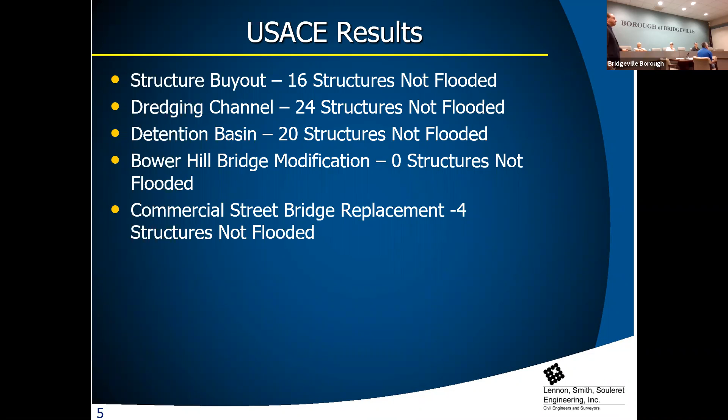So Bower Hill comes up quite often at the meetings. And Joe and I talked about it at the last meeting. Yeah, absolutely, we want to push the county so that bridge gets replaced without that column in the middle, because that's one of the steps along the way. And you want somebody else to pay for that. And then if that happens, Commercial Street has a useful life anyway. At some point in the next 20 years, it's going to be replaced. So that's something you could program over time, because it's a structure that eventually has to get changed out anyway.

It's not a similar structure to what you have at Bower Hill, where that structure's been there since the early 1900s. I think it's the 20s. Yeah, 1920. So that's a 100-year-old bridge. Commercial Street obviously isn't. People probably remember that being built. It's corrugated metal. It's got maybe 50 years. So when Commercial Street gets changed, it's gonna go another 100 years, and we wanna make sure it doesn't have that problem.

So if Alcosan takes care of the manholes or whatever, does that affect the Commercial Street Bridge span? No, because they'll just move it into the roadway, they'll go around.

So what we did when we got brought on to look at this was we looked at the Army Corps model. I reviewed it thoroughly. I got into the actual model so I understood it. Kevin and I walked the community with a number of council members, discussed a few of the areas, the stuff that's occurred over history, stuff that I remember occurring as a kid when I lived in this area. Everybody was on the same page. So then I dug into the model and started looking at options.

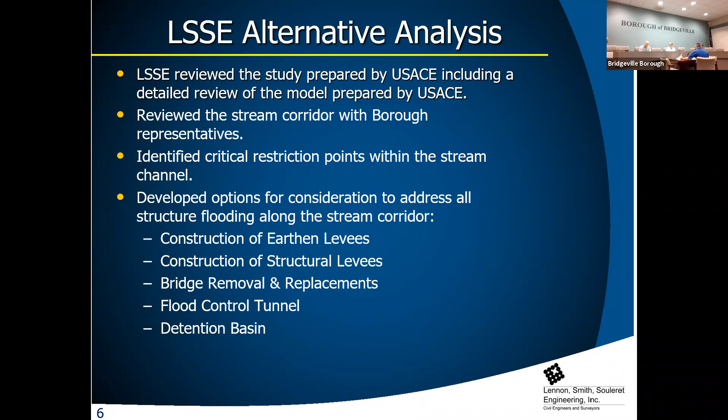So I mentioned the restriction points. The primary restriction points, obviously Chartiers Creek's back channel is one of the key ones, I've mentioned it a number of times. We talked about Commercial Street being a restriction point, and so is Bower Hill Road because of the center columns.

So if we can get that opened up, that lowers the water along that portion of McLaughlin Run for the houses between McLaughlin Run and Maple Street.

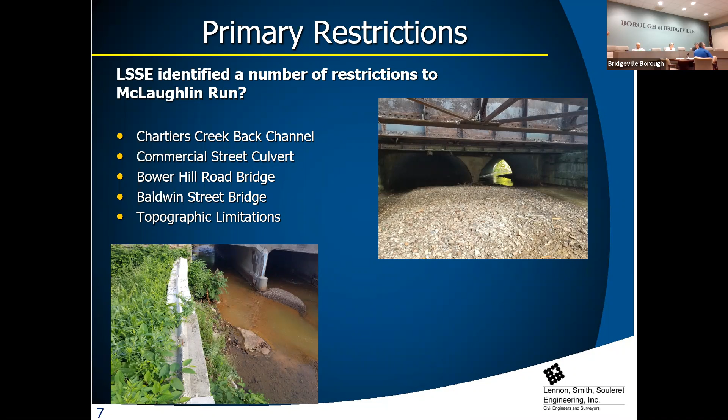And then topographic limitations, what do we have to work with? We have our nice floodplain, which before it was developed had steep vertical slopes. That's Western PA, it's steep vertical slopes. Then we have a floodplain, and we developed all the floodplains, that's where we want to live. That's what we have to work with. So those are the restrictions I looked at when we did the model.

So for detention, some of the stuff we have to think about. For a detention basin, you need an adequate area to do it. In the borough, there's not adequate area to do a detention facility of the size needed to have any significant impact on the stream.

Like I said, the Corps used the area of McLaughlin Run Park. The volume they used was 2.5 to 3 times the size of the ball field area. They had 9.4 acre feet of storage, which was about 4 to 5 acres of property.

We don't have that there. So you'd be digging into the hillside, digging into the houses on top of the hill. The entire park would be lost. They likely took the whole park and made it go away, plus the hillside.

Obviously that goes well beyond what the borough would consider. Losing the fields was a big step. To lose everything up there is probably out of the question, given the amount put into that park.

With the way we have it now, part of the field is not necessarily lost. It's a general activity field once it's cleaned up. It'll take maintenance to do that, but it can be used as a general activity field. It looked really nice, nice and green and flat. It looked great, but there's a bunch of debris.

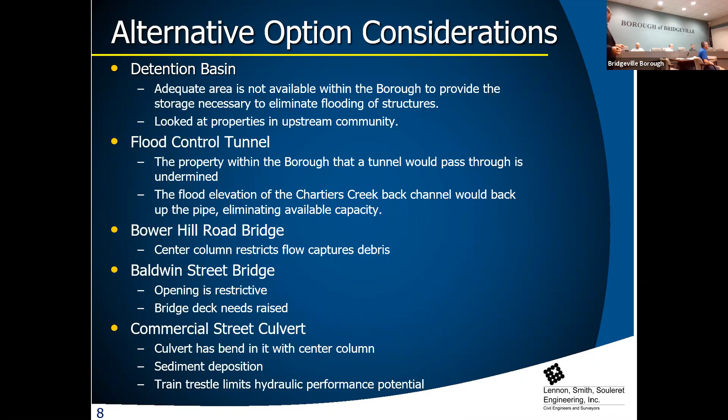So we came up with actually 5 options, though we'd call it 4 options. There's option 1 and option 1A, which is a slight difference—we'll get into that. A lot of these options, the first 3 or really 4, we broke out into 3 phases. These can be broken up into more phases as money becomes available, but we looked at it in 3 phases for costing as well as impact, to see what it would do.

What started this whole thing, for me, when I got into the model, was the first thing I did: I ran a model to put a levee wall from the skating rink up to Commercial Street. That's the first thing I looked at before we even got into the actual flood study of the project. By putting a soldier beam and lagging levee wall basically at the top of the slope, straight down, and cleaning out that sloped area, you actually gain volume in the stream, as well as get a levee wall that prevents the water from overtopping and getting into the property. So it solved flooding, but it also dropped the water surface elevation of the stream. As soon as we started looking at this, we realized that was important.

So phase 1 of option 1 is a levee wall from the skating rink to Commercial Street. It includes installation of backflow preventers on the existing storm sewers so that the stream doesn't back up and bubble up—something that occurred two weeks ago. It bubbled up in the inlets and started flooding the roads, Commercial Street, and Darby Way. Darby Way experienced the flooding before anybody else did; it came up to the inlets there because it's that much lower than the rest of the roads, so it started flooding first.

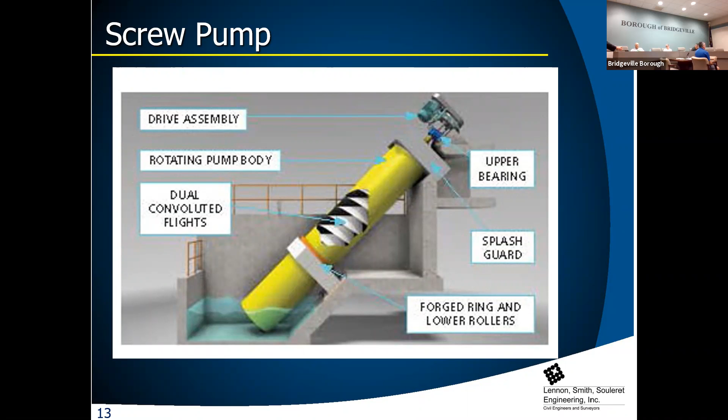You'll work on it, but Coraopolis, their first maintenance was in '72, we have a couple contracts now we're putting together. They've done very little to it over the years. Now, I can tell you they should have done more. They kind of left it go because it wasn't needed often, but now it's needed more. So they've been doing more maintenance to keep it running.

But I mean, annual maintenance, we're talking about a couple thousand. Generators a few thousand, because it's an oil change once a year, and then it's just making sure it runs. I'd say $2,500, something like that, per generator. And then the screw pump itself, we would have a maintenance plan that you would set up, put money into an account every year, whatever it is, $3,000, $5,000, something like that. It'll build up so at 20 years when you have to change out a motor,

the money's sitting there. A lot of people try to do that in reverse. When it breaks, you find the money. I'd rather see the communities do it like this: you set up and you put a little bit in each year. When it comes time to replace it, you have cash sitting there. Just do a dedicated account for it.

Okay, Phase 2, again, from Bower Hill Road to Baldwin Street. We're going to continue that thought process because we're so tight. We're going to build levee walls on both sides of the street there. We're going to eliminate the sidewalk from Bower Hill Road. We're going to promote a different pedestrian traffic route down Baldwin Street and reconnect it. It's not going to be an option to walk down there. Even with the road closed Thursday and Friday night, when they're doing the paving, that sidewalk is not a good situation as it sits. So our recommendation, we're going to get rid of it. We're going to create a different pedestrian corridor.

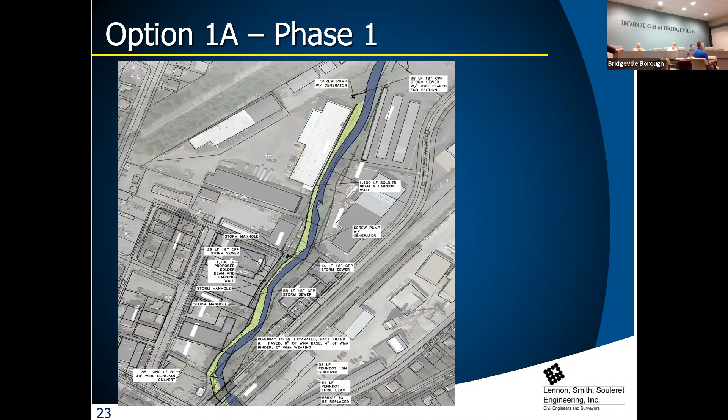So option 1A, I'll make this one real quick. The only difference between option 1 and option 1A is we replace the Commercial Street Bridge here. We can go through all this. The end result is basically a $1 million increase to build the Commercial Street Bridge. So there's the bridge, which is too far. Apologize, let's go back now.

Come on, it's locked up on me.

Does anybody ever recall seeing anybody walk Bower Hill Street, Bower Hill Road on the sidewalk? Yes, I was a kid, there was a couple walking yesterday. Was that you? No, it wasn't me. There was a woman with a little boy. Okay, yeah, I can see one person.

The bus line is with it. So we're going down, it's not pushing the bus over here on the road, over here, go down to the corner by the fire station and walk in there. So they'll come down and walk that way.

I think that's something for your active transportation study, you want to include so they know there's a potential you want to get rid of it. So they can figure out how do we move people to where they need to be then, because I think that's going to be an important component for them, since that's a cost-effective option for you: eliminating that walk and gaining that space for the floodwaters.

So that's again, the big change from option 1 to 1A is there's the Commercial Street Bridge. It'd be a Conspan arch, single span arch. That allows them to make that bend. And then we'll just replace the roadway over top of it. Phase 2 stays the same, phase 3 stays the same in that option.

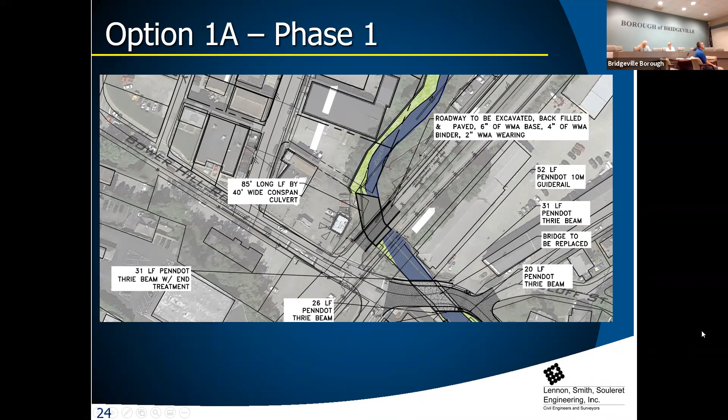And this is one of those that could be a single grant project. No matter what, over time, you've got to change that out anyway. It doesn't matter when you actually do it. The permit's pretty simple to get. And it could be one of those ones you put in for a grant and just do it. You could do it in the next 5 years, 3 years. You could do it next year and say, okay, check that off.

That's one thing. So just because it's an added item, if it's something that practically speaking, everybody here knows is a better situation, to eliminate that center, then we add that to the start of looking for money options. It's an easy project to build.

Okay. Option 2, very similar to option 1 and option 1A. The big difference is the section between Bower Hill Road and Baldwin Street. We looked at this in a different situation. We made Baldwin Street a true pedestrian corridor. We eliminated the Baldwin Street Bridge and put a simple small pedestrian bridge over that area. Greatly improves hydraulics in that situation. Opens that corridor for pedestrians, put a cul-de-sac where Baldwin Street ends, and put a park. So it kind of creates that pedestrian corridor from the residential area down into town.

Phase 1 stays the same. Phase 3 stays the same. It's that core in the center. You start looking at different scenarios in that situation. So, okay, 1 stays the same.

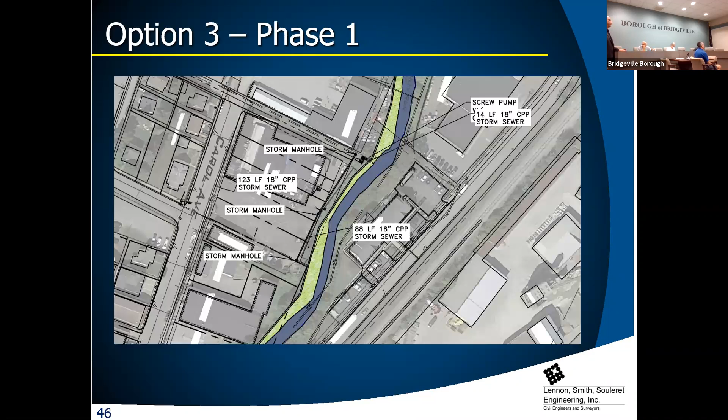So phase 2, we get rid of the Bower Hill Road Bridge. We get rid of Bower Hill Road. We reconfigure the intersection at Baldwin Street. We're gonna put a roundabout. We're gonna replace the Baldwin Street Bridge with a much bigger bridge. And then reconfiguring the intersection at McLaughlin and Bower Hill Road.

Instead of doing structural lagging walls, we eliminated Bower Hill Road. And you see we reconfigured the route on Baldwin Street to make a plus intersection instead of the offset we have today. We're going to do an earthen berm. We're going to create a riparian buffer, so it's going to be a vegetated buffer. It's going to be more of a park atmosphere through that area. That's because you can widen the channel to get rid of water.

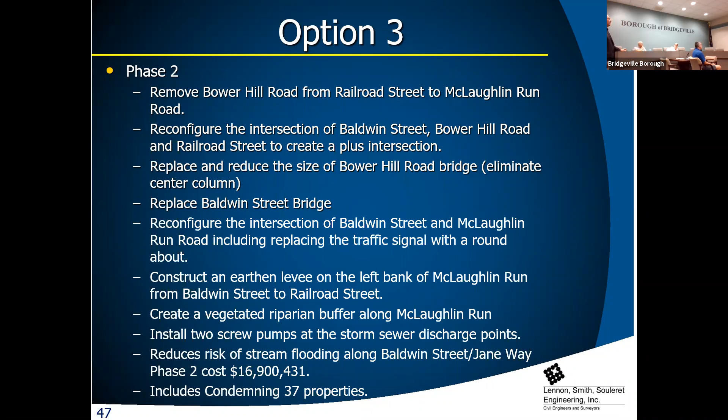Yes. This option, just for this phase, is about 16.9 million. Key to this is it condemns 37 properties. Now it creates a section of land that can be redeveloped after it's all done and probably be resold to a developer that would want to develop it. But 37 properties are going to be condemned. So this is not necessarily palatable, but it's something that's been discussed.

This kind of matches up with the study that was done previously by the land planners for this corridor. There's the plan for that section of the corridor. You can see all the green space that's created. You can see the roundabout down at Baldwin Street. See how we rerouted Bower Hill Road into there so that you don't have that intersection that you have today, where you gotta stick your nose out to try to see. And you get up to where the Beer Distributor is. The Beer Distributor is one of the properties that will be taken, for reference purposes. The road would go right through the Beer Distributor.

It would create a plus intersection, a safe intersection between Railroad Street, Baldwin Street, where it connects in the Bower Hill, and then the road comes up the hill. So we're losing 6 businesses as part of this plan. More than 6. Yeah, there's a significant impact. Yeah, this is a big swing with a lot of impact on properties. This does kind of mimic what the planning document was that was out there.

Traffic flow wise, you hire a traffic engineer, they're going to embrace this plan. They're going to say it's a great plan because it's going to fix the traffic. But it's going to have problems in palatability on how many properties, how many businesses. The impact as far as businesses, economic impact, it's massive. And this one isn't just a dollar impact, 16.9. This eliminates a bunch of businesses. Yeah. They may flood today, but they're no longer here, so they go off the chart as far as that. But then you don't have your tax revenue. But you do, like, all directions.

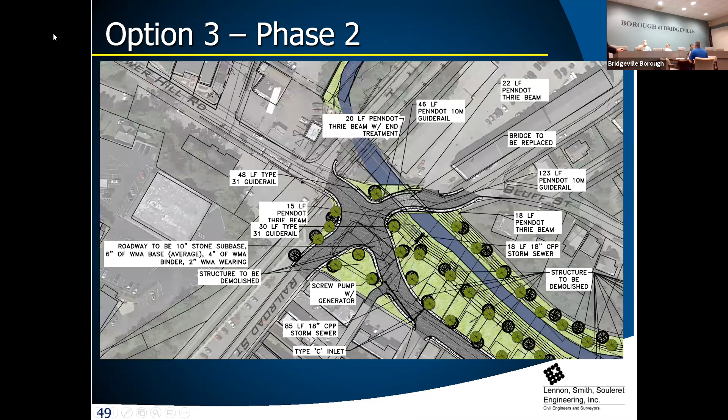We're stuck with that crossing. Will it improve the sidewalks? Greatly improve the sidewalks. That's the key. It creates a true plus intersection instead of the offset misery that we deal with every day. And what this option does too is it gives you a natural stream channel.

If you take the whole stream and you push it up tight to the rock cliff, right where Bower Hill is, then it gives you more room to put the road going through those backyards. But then all the costs go up, because now you're putting walls back in. So this option maybe goes to 20 million, but you end up with not Baldwin Street being the road, but Bower Hill just moved.

So like I said, we could bring it straight out through here and dump more, which would probably save one or two parts here, but the idea is to get the nice plus intersection for safety.

This is just for giggles. Why do we need a bridge there? Why don't we make an alternate bridge further down towards Commercial, going behind Silver's or something, over to Commercial and then round out? You have to get another track crossing, I would think. That'd be another rail crossing. And I don't know that you can get a rail crossing today if it doesn't have a street with a PUC number. Do we not shoot straight down towards Main?

Yeah, if you had a street that had a crossing number, you can reopen them and do it, but if it doesn't exist, it's nearly impossible to get a new crossing. No, there's not one down there. I mean, if there was, that's getting completely rid of the bridges.

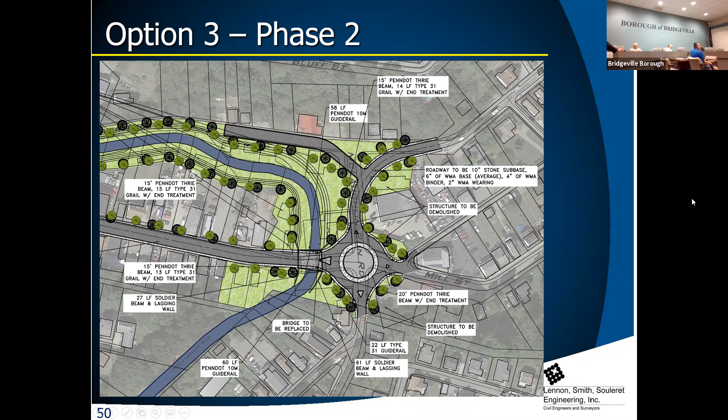Looks like I have to load it. Computer drive. There it goes.

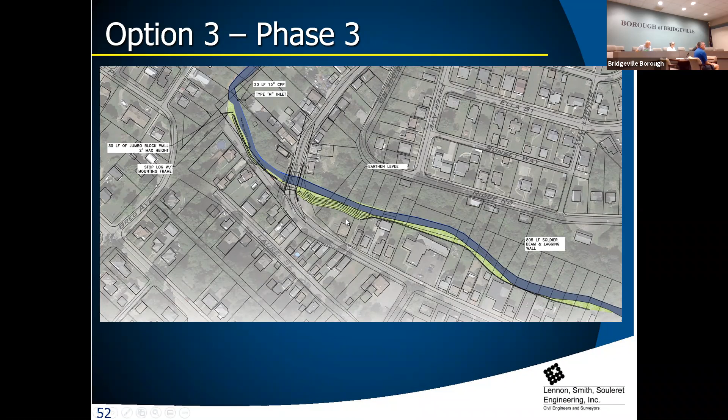Okay, so there's the flood map. Very similar to the one for the other two options. Basically, all the properties are out of it, but we've greatly impacted them. If we shift the road closer to the stream a little bit, same scenario, that land on the downhill side of Baldwin Street / Bowerville Street, whatever we'll call it, would be out of the floodplain now.

And what makes the ground underneath stable enough to put a road, as opposed to Bower Hill where we're having so many problems? Before it's constructed, we would have geotechnical analysis to make sure that it's solid, and if there's undercut that needs to be done. For instance, for Bower Hill Road, our cost includes digging down 4 feet and getting all that material out of it.

Is this not the railroad track here? No, that's a cement plant. Okay. I was gonna say, I see an access road right there as well. Yeah, the railroad track is on the left side of the cement plant. And when you get to the end of the cement plant, it's a 100-some foot vertical cliff. Thank you.

Option 4. There's two parcels in Upper St. Clair, up around the bend from T.A. Robinson, that are owned by a private property owner, but they're along the stream, something like 6.5 acres. We can get a 9.5 acre-foot detention facility. That would be about 4 feet deep.

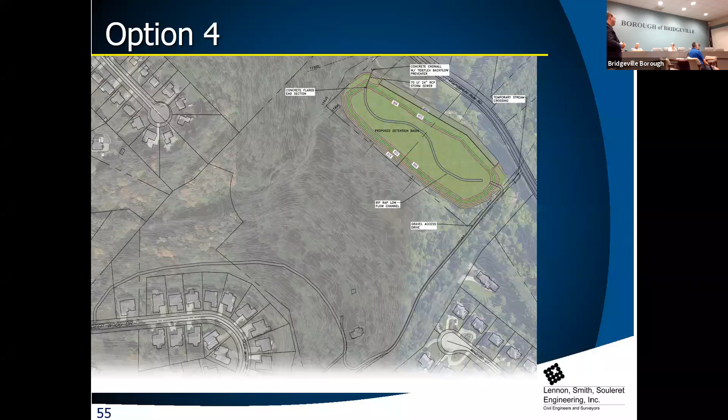So that all being said, that's what it looks like. One of the keys to this is the access to maintain it would be an access road that comes all the way up and around to the top area. It's shown on the plan there. But this would be fully in Upper St. Clair. Upper St. Clair would have to work with us and adopt this project. The properties are in their community, the facility will be in their community, and the operation and maintenance has to be negotiated between the parties.

That being said, that's what the flood map looks like with that pond in place. It shaves about, I think, 78 or 79 lots out of the flood zone. But they're the ones that don't get hit every time. They're the outskirt ones.

Ones that get impacted all the time are still going to get impacted. It can't shave enough water down to get it to the point. So as Kevin mentioned at the beginning, we come full circle. The key is we need to convey the water through Bridgeville.

Putting the detention in, it helps, no question it helps, but it doesn't solve the problem. In the future, do we want Bethel Park and Upper St. Clair to try to capture the water at the headwaters and release it at slower rates? Absolutely. But does Bridgeville Borough want to wait until that may happen in the future?

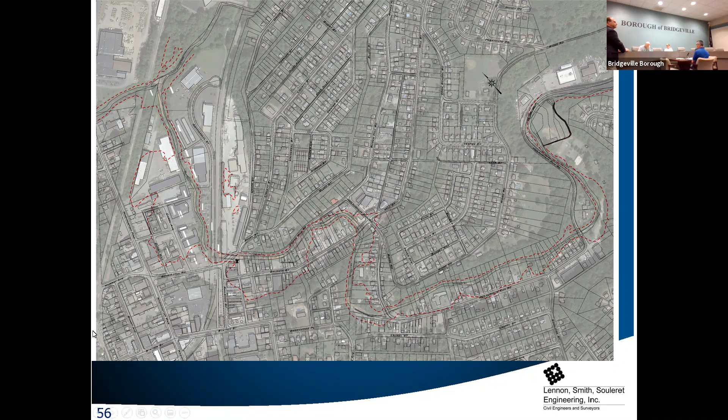The largest issue with a facility of that size is, even though it does quote help these structures, these are not the folks that John indicated got hit last week. They're still going to get hit if you build that.

And when you spend $4 million and say, what did I get for it? Well, people that flooded once in the last 20 or 30 years who never come to a meeting, that's not the people being impacted. The folks that live along the stream are the ones getting hit with a lot of frequency. Option 4 doesn't do it.

Now, if you get a multi-municipal grant for $4 million and an agreement with those communities to do something, you don't have to maintain it forever. It's a good thing. But to do that and not some of the other options doesn't get you there, because people are going to say you spent $4 million and didn't help.

Yeah, you've got to say that's $50,000 a year. Every time it floods, you clean it up. So here's a summary.

Options 1 through 3 basically don't eliminate all the flooding, but they reduce the risk.

First two options, again, if you remember, I said there are 173 occupiable structures. We took 2 to build it, so 171 are saved. Option 2, there are 6 structures taken, so 169 structures are saved.

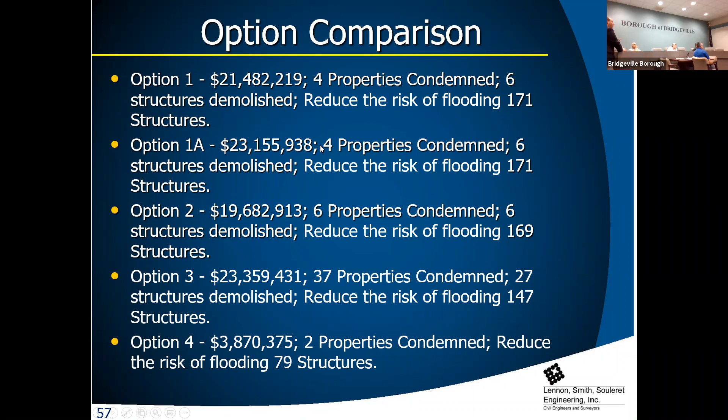So that's the options we came up with, and we were able to perform analysis to see what the impacts are and what the cost would be. As I indicated, that's a big chunk of money whichever option we choose. It doesn't have to be all spent at the same time, it can be done in phases.

And there's a number of grants out there now that we have a study in place. There's a large number of grants that will be opening in the near future that we can apply for monies from. U.S. Army Corps of Engineers has a few grants that open up every year or so.

Obviously with COVID, the granting systems are all kind of wonky. They're still trying to award grants from last year. So the new ones haven't opened, but Army Corps has 2 or 3 grants.

FEMA has a mitigation assistance grant we can apply for. CFA, the Act 13 monies, there's a flood mitigation program grant every year we could apply for some monies from. They also have the PA Small Water and Sewer Program, and there are aspects of that we could apply to this.

CFA also has a larger H2O grant program with a variety of projects to go after, but it's a grant we can apply for. Then you go down to the county, DCED has a number of grants we could apply for. GEDF grants are available too, that's a lot of money we're using right now for the Janeway and park project, which was a GEDF grant. So the grants are out there and available.

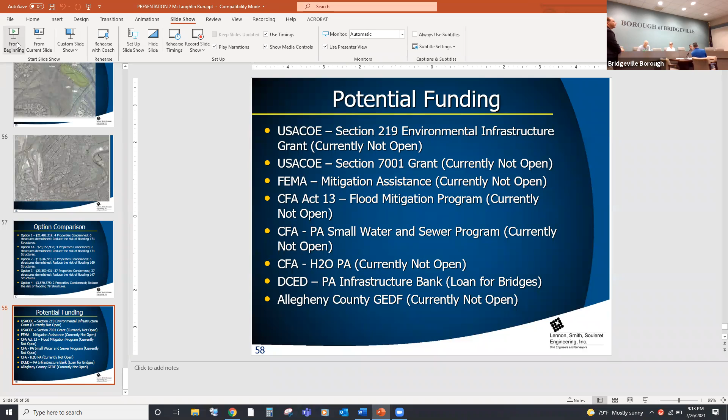Phase 1 doesn't change through all the plans. So to me, phase 1 doesn't change. You can't build phase 3, or you probably shouldn't, until phase 2 on Baldwin Street gets done.

So I'd break it into just those 3 projects. I would go aggressively for funding for phase 1, because if you build phase 1, which is the portion down here, it helps phase 2, because we give more area downstream for the water to get through, get that permitted and built.

While that's being built, because now you've got a project that got funded, you have a reason why phase 2 should get funded. By then, vet through all these questions tonight on Baldwin Street and have a series of meetings that you can discuss with the property owners, the ones that's impacted, what's best for them too, because if we move Bower Hill Road, we put these structures, we get rid of one side of Baldwin Street, maybe the other side of Baldwin Street has a big negative impact.

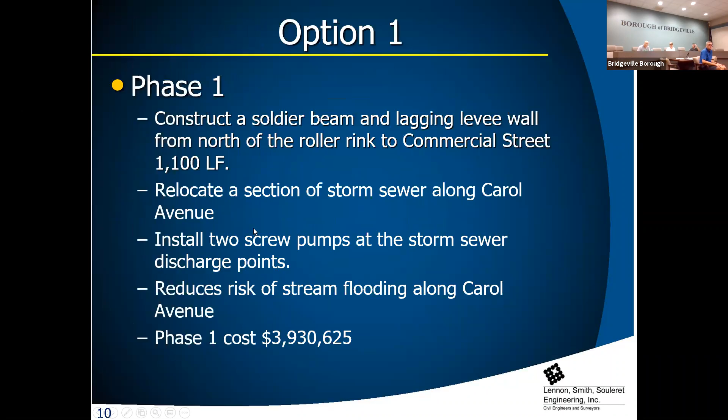I mean, you could get to the place where all Baldwin Street, the right answer is all the structures get raised, and you just change Baldwin Street, you fill the whole thing in, raise it 6 feet, and you put a new town. I mean, the amount of structures that you're talking about at the end of the day, it's not astronomical. So if you get phase 1 while you're building it, work to solve phase 2.

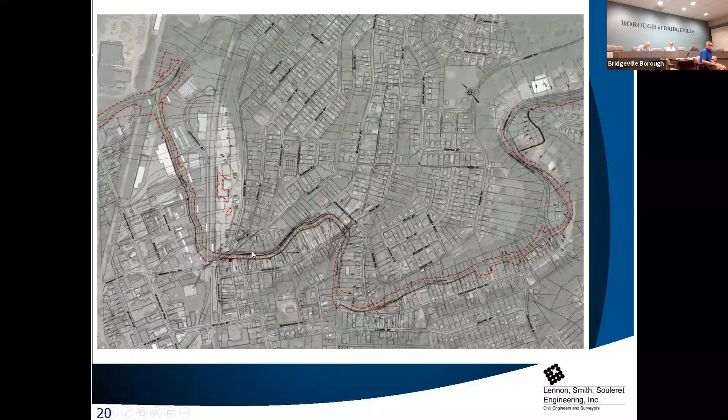Yeah, I think it's traffic planning. Ask them for an amendment to that to look at traffic through that corridor for you. Instead of going from one end of town to the other, how do we just get traffic through this corridor? See if they can look at it with pedestrians to give some guidance to planning commission. That may be a good idea. Because we got to solve pedestrians. If we get rid of the sidewalk, we're going to solve pedestrians, should we solve traffic and include that?

And then come back with, okay, for phase 2, here's what we do. And phase 3, again, there's not many tweaks to phase 3. And phase 4, that pond, let's go start talking to our neighbors and see if we can get a multi-municipal grant and do that up front as well. So if you do phase 1, you do phase 4, you work on phase 2, because that's going to take a while. I don't think anybody here tonight knows exactly what you want to do with phase 2.

Got a lot of good questions. There's 2 bridges involved. What's the county going to say? What do you want to do with your bridge? Because it's a lot of money to maintain it.

Because if you decide you don't want to maintain that bridge, then you just want to move traffic all to existing Bower Hill Road. Now Baldwin Street's a dead end, you don't impact any businesses. And there's no traffic on that road, and all your properties and tax bases stay the same. Do you want to do that as a community? You know, how's that impact you to get rid of Baldwin Street?

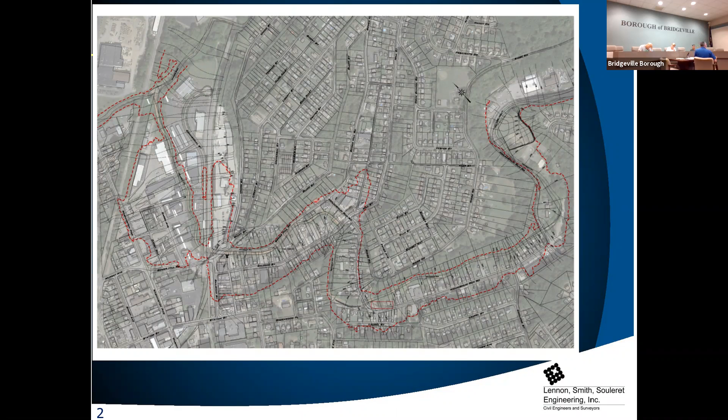I think you can answer those questions over a longer period of time, because phase 1 and phase 4 is going to take a little bit of time to get that funding set up. Now that you have the study, you can apply for all the grants. One of the requirements are you have to have a study. So you never had that. You have that now. You have options.

Council, after planning commission vets this, can take it under consideration, pick the options for phase 1, 3, 4, and then phase 2, just say, we're going to kick the planning to figure out traffic, the flooding, and we know what the models look like that way while you're getting phase 1 built.

Because then you're making a big impact for everybody. Phase 1, check it off, then you move to phase 3 or phase 2. If you got phase 2 figured out, then you can move to Baldwin Street.

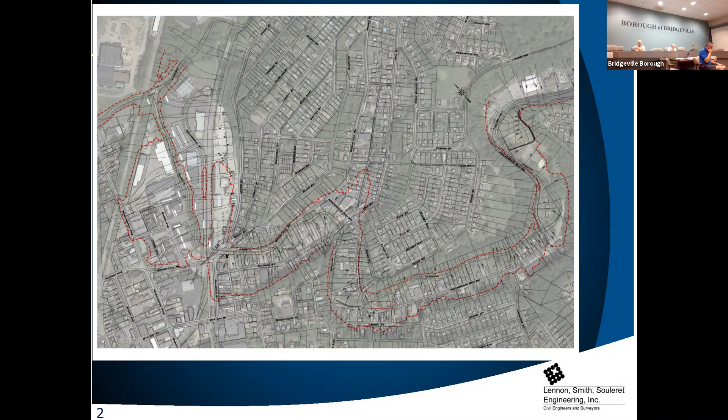We have some ideas for Baldwin Street temporarily. We're not ready to kick them off tonight, but there may be some temporary pumps in your future to get past some flooding issues you have. There won't be screw pumps, but it's something at least for these quick events Public Works could maybe use. Can't get them permitted, but in an emergency situation it may be worth having on hand, and they're not that expensive. So there's some ideas we have there, and we'd work with council.

I think that would be a good way to move forward, to show progress. From where we started, a year and a half ago, to today, we got all the projects on your list accomplished, and now we're moving into the next phase, which was to get this study done and figure out what the next big piece was to do. I think we've identified phase 1 as what to do, and keep maintaining everything you've done.

And program it every year. You're going to spend some money there. Public Works is going to have a little bit of equipment, could have the right stuff to maintain these items, but long term it'll pay dividends. It's a big deal. So phase 1 is the cornerstone, basically.

Yeah, and what we found, even with your park projects, I think you've seen this. You've been getting money because you successfully complete projects. You got a lot of funding in 18 months that other people didn't get because you were spending the money successfully on projects, and people can come out and see that you did this, and you did this, and that's a big thing. So your track record is now that you're getting money and going to projects and committing local funding. Council has committed the part that was needed and continues to do so. Your track record's good from that standpoint.

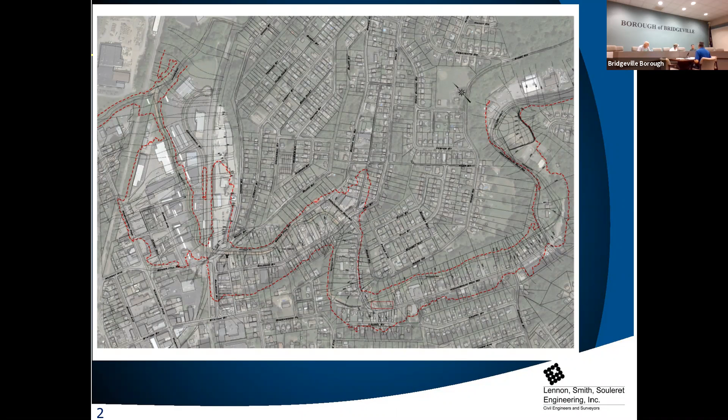All right, what do we want to do? What do we want to do?

Like I said, I remember we watched the stream how many years ago, and the difference between then and now. It doesn't happen overnight, and they do seem to be talking. I think there's some good advice. It's just a matter of choosing whether this is what we go with, we've got to get the money. If we're going to go out for money, we have to have this piece to go after.

Do we want to recommend that we start with option one of phase one? Move forward with that to the borough and think about it. Yeah, it's all in their decision. So we can easily, with option one, it doesn't change much, it's pretty much consistent.

And that channel right behind it doesn't change either. So I think it's an easy decision to make, because you're going to have to fund anything anyway. So that's all we're asking now: hey, $3.9 million to fix it. We're saying hey, this needs fixed, and we're going to go after funding like we did with all our other projects, and we just think that once we get the money, it should be done.